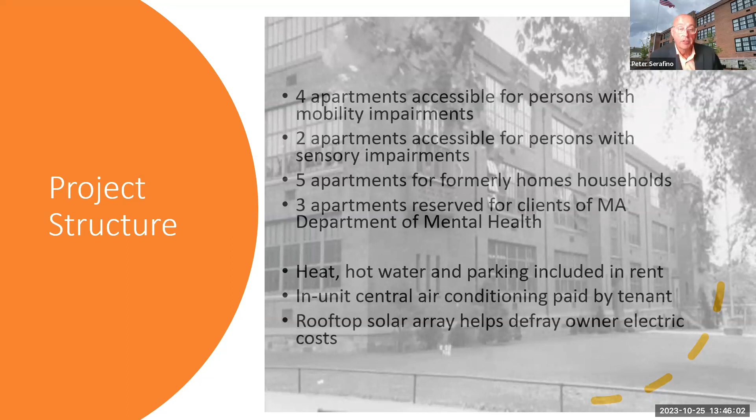Again, a little detail about who we build for and some important elements of the property. There's a picture of it in the mid to late '20s when it was first brought online.

That was in 2011, and we bought the building in 2018. What we acquired was, if you can imagine this type of school building, we've all been in those kinds of buildings, imagine that the city had walked out the day after the tornado and left everything in that building. So anything and everything you could imagine that was in a school building was stuff we inherited and had to figure out what to do about.

As I said, we're housing developers, and all of a sudden we had a couple of years to ponder how to get rid of this stuff. First of all, it's expensive to get rid of, and we knew sending it to landfill just didn't make sense. I saw lots of scrap metal and thought, well, we're going to make some money on this. Well, of course, that was not to be.

I was very fortunate that between Abby Massaro and Lenny Freed from the Old Stone Mill Center Zero Waste Maker Space in Adams, Mass, they were my two gurus. I didn't know anything about how to get rid of all the stuff in this building, and I'll show you some pictures of that. Between Abby and Lenny, they gave me all the guidance I needed, and it took a lot of time.

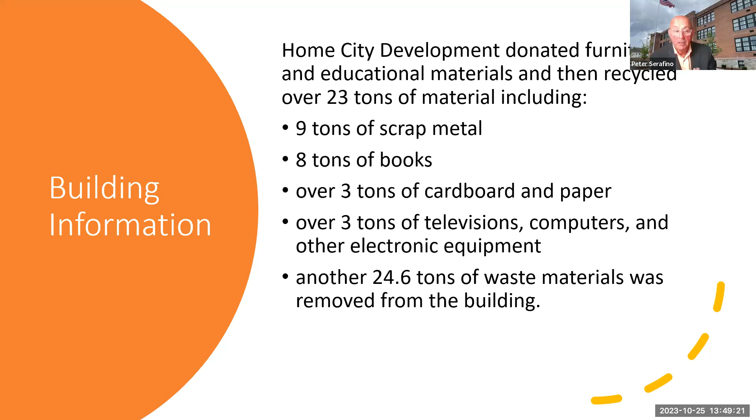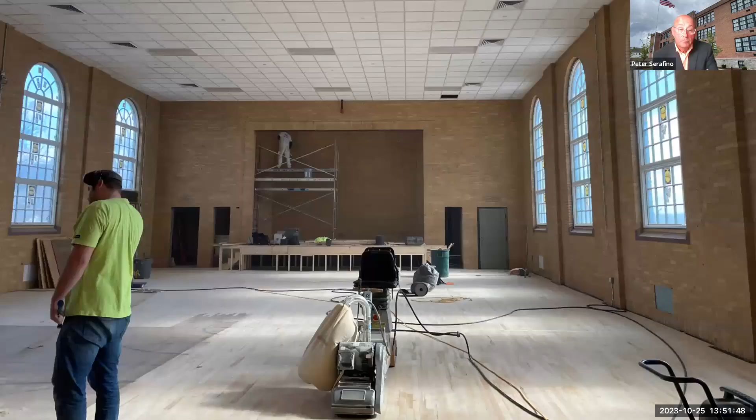And then here's just an example of some construction photos. Solar panels on the roof - so we're taking an older building and making it a modern building.

These are just examples of the finished product. We added an elevator to the building as well.

And here, here we are when we were done. We had restored some architectural finishes - if you look at the window detail at the far left end, that was missing. That's what it looked like originally, but it had been removed over the years, and as part of the historic rehabilitation, we restored that.

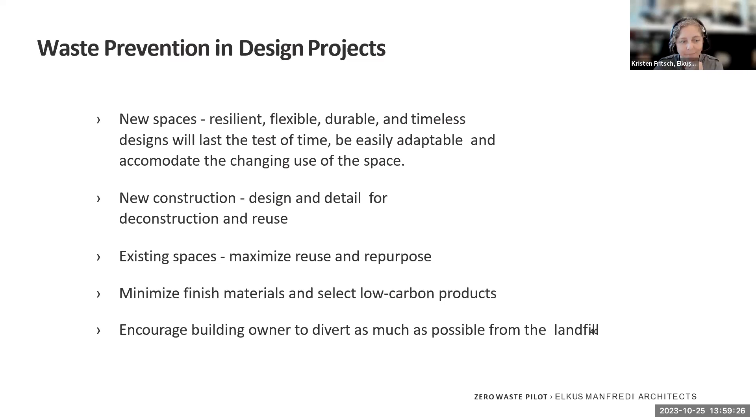So how do we engage owners to do this? It's really challenging because there isn't really a role for that person on a project, so who organizes this effort is always a big question. And if you don't have someone on the team that's really passionate about this, then it's challenging. And then short timelines, right? We're always on really tight timelines, and sometimes these things take a lot of process and thought.

And then, you know, we do see a surplus of items used in the marketplace. Like Peter mentioned, metal isn't always desirable. Things like lockers or things like that, you think are pretty useful and could have a new life, are hard to get rid of.

So it wasn't a clean building. But the goal of the campus, if you know Simmons, is a very tight campus organized around a quad. And then they have a residential campus or residential kind of block that's a couple blocks away and disconnected from their campus. And to improve their efficiency on campus, of staff and just having their students closer together and their assets, they wanted to put everything in that one quad and move forward with bringing their residential to their main campus.

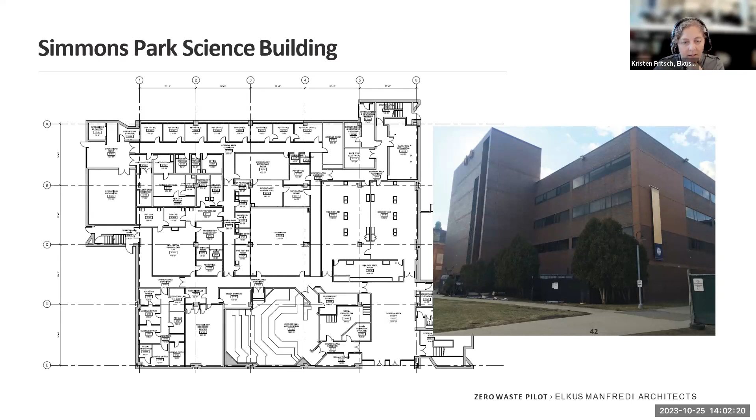So we started by connecting with the city of Boston. I heard about their zero waste pilot program and had met Susan through the CLF reuse group. And so we connected with them, and she brought in Abby with Recycling Works, and through other groups that I'm involved in, Michael was also brought in as a consultant. And the project had a tight timeline. Of course, we had no budget for this, and it wasn't in the initial conversation. So we were coming in during the process and trying to bring awareness to the possibilities.

And Skanska was the contractor. And there's always complications with the timelines of permitting and contract things. So we were sort of working outside of that and just trying to do as much as we could.

So we really informally identified these goals. This is a learning opportunity for all of us. Maybe we can understand the hurdles and how to get around them. Maybe we can get some cost data from the contractor and the impact of the waste diversion and how it might benefit the university or not. And then, who are the reuse vendors and material streams that we could work with?

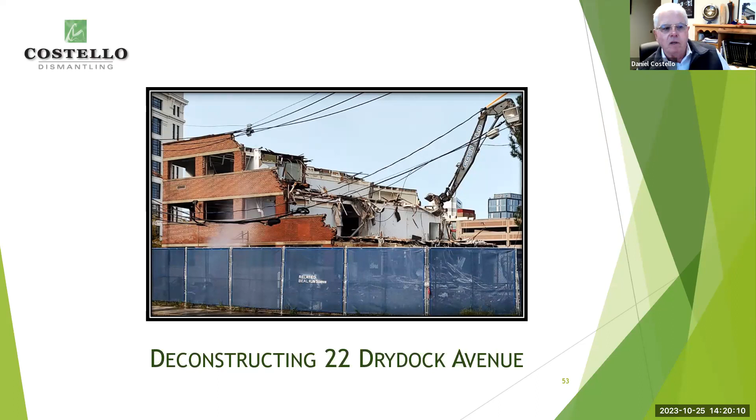Thank you, Pam. Forty years goes by pretty quickly in the deconstruction world. When Mike Elliott and Kathy asked me to make a presentation for this meeting, I thought of a project we were doing, an industrial demolition project in the Boston Seaport area, a very vibrant area of the Boston world right now. We had some interesting aspects to this job that I thought would be interesting to this group. Kathy, next slide please.

The case study we're doing is at 22 Dry Dock Ave. Many of you may be familiar with it. In the background, that big white building is the former Boston Army Base, now the current design center in Boston. The site where this is located had all been U.S. Navy property, part of the Navy base after World War I and World War II up until the 70s. So half its life this site recently spent as military, and the other half has been in commercial use, some of it used by the city of Boston for space. Next slide please.

Deconstruction is a very valuable tool for the demolition contractor. We're always on the lookout for possibilities for deconstruction, for salvage of material, and always looking for recycling opportunities derived from a demolition project.

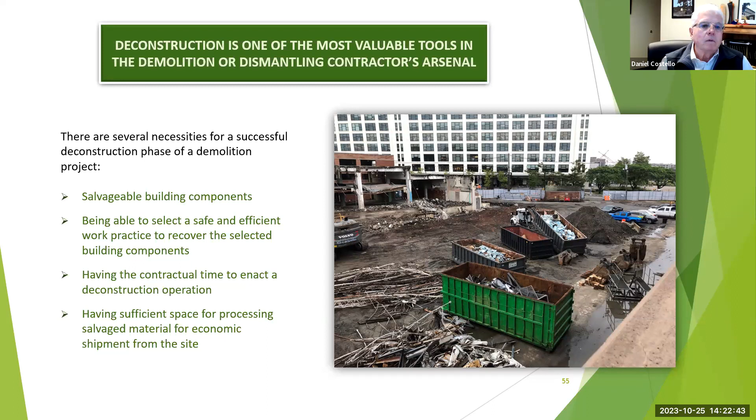There are several things that attribute to a successful project. Kristen just mentioned some of them in the Simmons case study. One, you need salvageable materials first of all. You need the space and the time to extract those materials, and you have to have a safe work plan to allow that to happen - safely for the workforce, but also for the environment and the overall project. Sometimes it's a difficult challenge with contractual time constraints, and lots of times space constraints on a site, to be able to do salvage successfully and relatively easily. Next slide please.

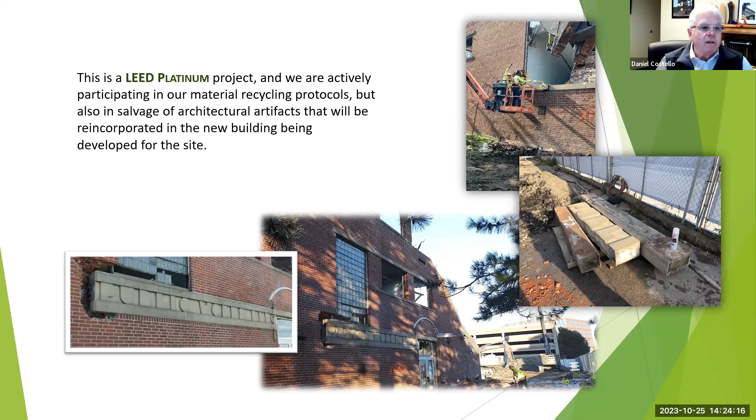This project was a LEED Platinum project, the build out. We're doing the demolition to provide the space for a LEED Platinum building being put up on this site. As part of that effort, a portion of the past of the building - this was a U.S. Navy Public Works Department building initially, built in 1923, so the building just celebrated its 100th anniversary. As a tribute to that building, Related Beal, the developers and owners of the property, had us salvage the very ornate Art Deco Public Works Department sign carved out of granite, and carefully remove that from this site so it can be incorporated into the new building - a great homage to the past of this building and the site. So we're very aware throughout this process of it being a LEED Platinum project. Next one please, Jeff.

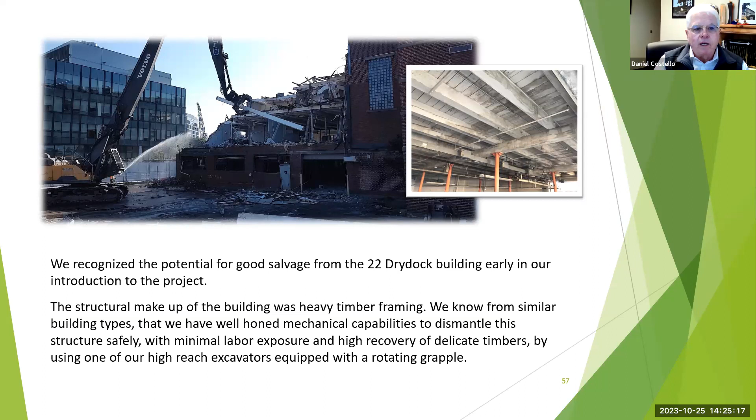Early on, from our first exposure to this building, we realized there was great salvage potential. The primary thing was that there were very substantial wood timbers comprising the structural frame of the building. Over the years, we've developed a very efficient way of extracting and recovering that timber for its value to be resawn and reused. We recognized that early on, and designed our entire work plan for the project based upon being able to recover these timbers.

A great deal of planning had to go into this. We had two buildings on site: the lower building with brick and concrete, sort of tan and brick color, and to the left, the Public Works building, 22 Drydock, a 3-story brick and wood frame structure. Both buildings had extensive asbestos abatement that had to be done, including the roofing, which had asbestos content, and the windows and window frames, which had to come out.

Part of our thought process was that, while abatement was taking place, we were also removing interior partitions and interior structures that were not recoverable, that may have been cross-contaminated or contained asbestos material. Removing those helped expose and facilitate the subsequent removal of the structural timbers of the building.

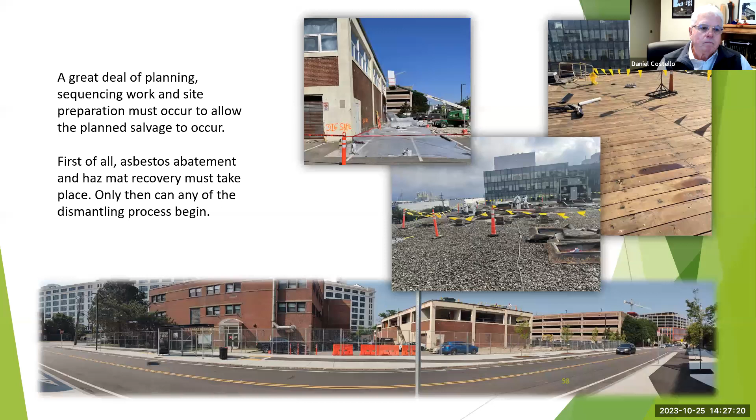After abatement, the first thing we wanted to do was remove the lower two-story building, so that we had a very nice level work surface and storage surface on the slab left after demolition of that building. We took that building down first to give us room to take the building to the left down.

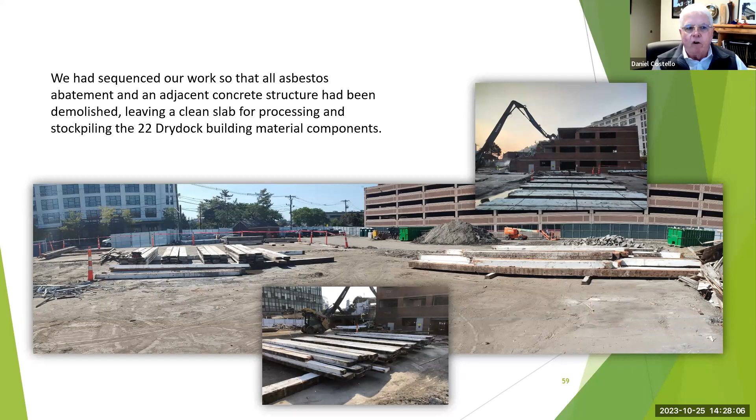Here's that work area that was created. You can see we were able to carefully dissect, deconstruct, and dismantle the building, particularly using our high-reach excavator to very carefully go in and extract the timbers. We needed a lay-down place so they could be sorted by size, and we could do some preliminary cleaning so they could be transported well. This space let our work be conducted in an orderly manner.

This type of thought process requires a very systematic process to take place. As we harvest material, we're also deconstructing the building by component and separating that. Having the luxury of having created space on the site, we had staging areas for the different debris streams that would be leaving the site as part of the demolition work.

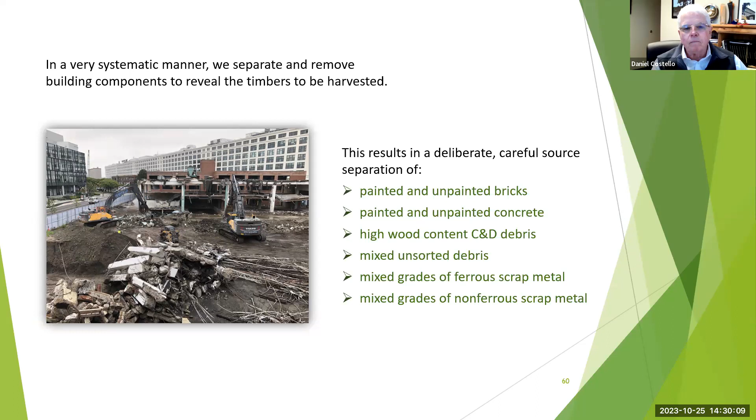You can see in that process we had all these categories of material. Each of them needs to be separated, and each goes to a separate facility that specializes in that type of material. It's a very big organizational task, one that requires a lot of experience, training, and coordination with the crews on the job.

We do that work almost primarily mechanically. Once the asbestos abatement is done, we really don't have a lot of labor on site. We have machines and excavators with grapples and material handling devices, and little skid steer loaders to separate things. Then we have trucks coming at regular intervals to remove each category of material we're removing.

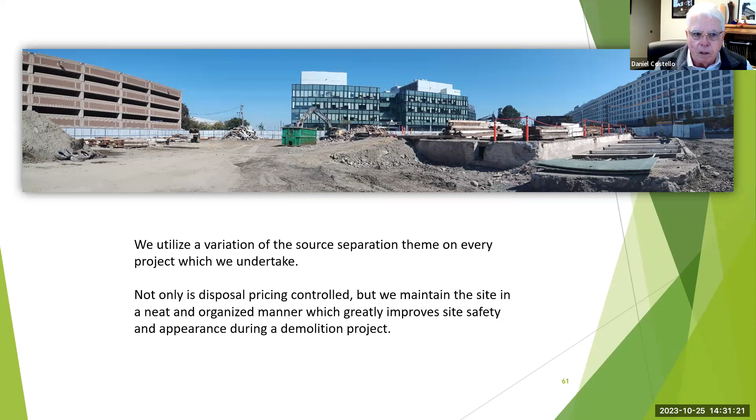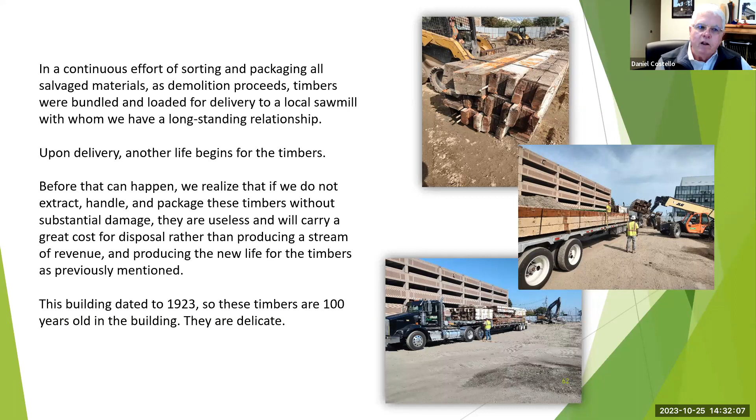You look at a building like 22 Drydock that had very nice timber recovery — we see some of it here. But that's the way we do all our buildings. Every one we try to undertake with source separation. We try to maintain the site in as orderly and neat a condition as possible, for general site safety, worker safety, and the safety of people who could be around the site. It's neat, it's organized, and we want it to look like anything but a demolition project. It's a very deliberate attempt, all the time, to manage the way we dismantle a structure, and also to separate and manage the debris coming from that building.

The timbers are a unique product. These timbers, as we said, were 100 years old — they were put in the building in 1923.

That date alone told us a lot about the wood that was in the building before we even started, before we had the job. We knew from the 1923 building date that the wood was probably not southern yellow pine. By that point, southern yellow pine, which was the predominant building material in our textile factories and industrial 19th century mill buildings, had been exhausted by the early 1920s and wasn't available for construction. So this being a Navy building, we realized the wood probably came from the Pacific Northwest. And as it turned out, it was Douglas fir.

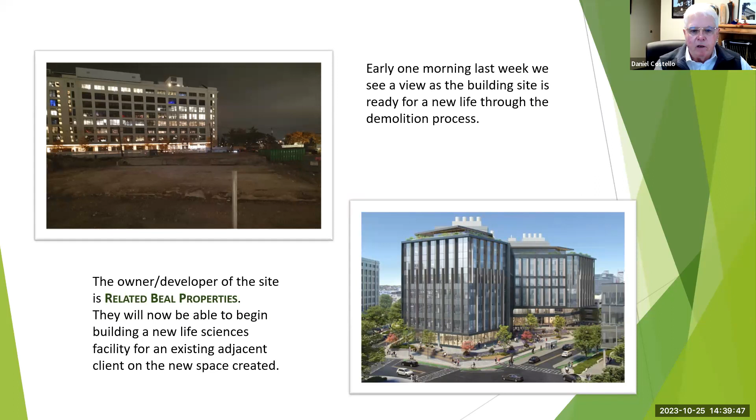They have a big job once they get the stuff at their site. They sort by species, which is very important to them, because the species determines the end product and determines the end buyer for their materials. Each species produces specific looks and types of finished wood.

So as they get that, the first thing they do is a very careful manual inspection of every single piece of timber. They use metal detectors and hand tools of all types to pull out nails, screws, bolts, staples, any type of metallic attachment, and believe me, there are a lot of them on wood that's been in a building for 100 years. At that point, once they're satisfied it's free of metal, they're able to go through a sawing process, then millers and planers and a kiln to dry the wood and make a finished product.

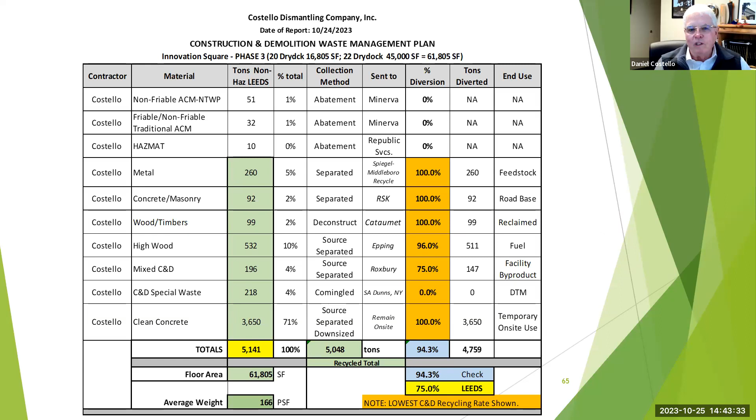Related Beal Properties is the owner and developer of this site, and they're about to put up a new building for one of their life science clients, an existing customer, right next to where the new building will be.

So we have to thank them. They're very supportive of our efforts, very supportive of the recycling and sort of sensitive way in which they handled the demolition of these buildings on site.

To do it in a controlled manner, we're always concerned with recycling, of course, but in order to get there, you need good dust control, good vibration control, and you need to respect the surrounding community where you're working. We try to do that all the time, and it's certainly a goal of how we conduct our dismantling operations.

So this is part of the material waste management plan that we will submit at the end of the project to Related Beal for their LEEDS credit for the demolition portion of the work. You can see we came up with over 5,000 tons of material on site, with about a 94% diversion or reuse percentage.